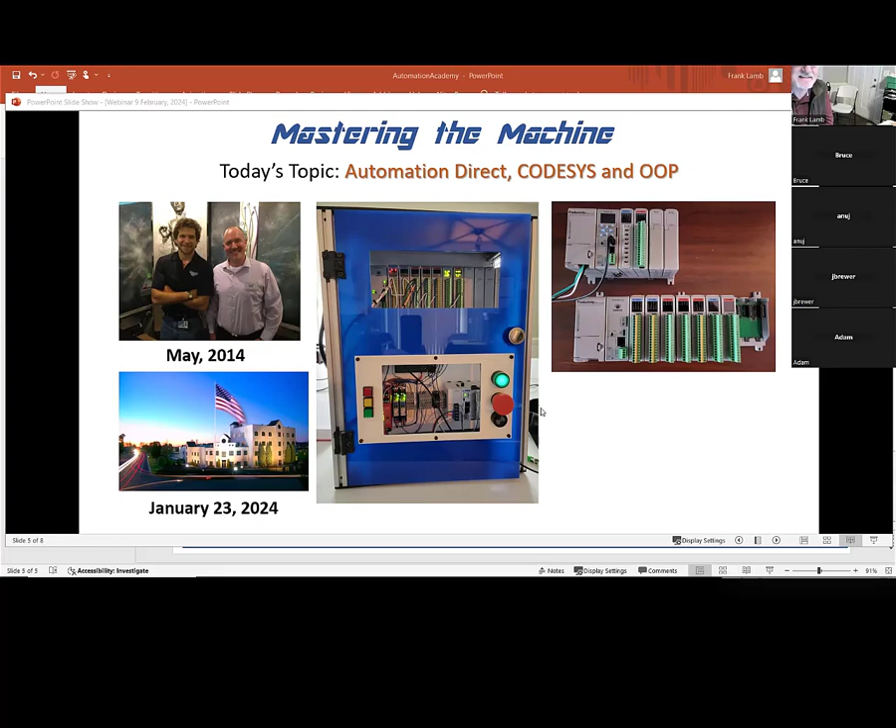So the 23rd of January is when they released their Productivity 2000 CODESYS controller. There's a picture of it on a table there, and a picture of it built into my trainer—I'm not sure if you can see this, but the trainer is over there with the other computer ready to go. That's the thing I'm going to try to go over there and connect with, but I'm going to have to use this computer to do it, which is going to be tough. In any case, that's what all this is about. A couple things I wanted to mention, and then I'm going to try to migrate away from this PowerPoint.

This was a post from Paul DeJong, and Paul DeJong teaches PLC classes around the country like I do, for a company called Automation Training in Canada. He teaches Allen Bradley and Siemens like I do, and sometimes people ask him to convert equipment from, for instance, Allen Bradley into CODESYS. He's doing a big job on that right now, and he actually posted on LinkedIn asking how he can make CODESYS look like RS Logix 5000, which is a very interesting thing to do. I don't know why you'd necessarily want to do that, but some people are familiar with a certain programming environment. So he put this up there, and I thought that was pretty cool.

Then another slide I had ready here about CODESYS is this book, which I have. Let's see if you can see that. It's actually open down here, ready for me to hook up and talk about. Then, like I said, I got sidetracked on this computer. This is the book on CODESYS, and it has a lot of really good information from Gary Pratt. Gary Pratt ran the North American CODESYS operation and taught CODESYS around the country for, I don't know, 10 or more years, I think using the Bedrock automation platform.

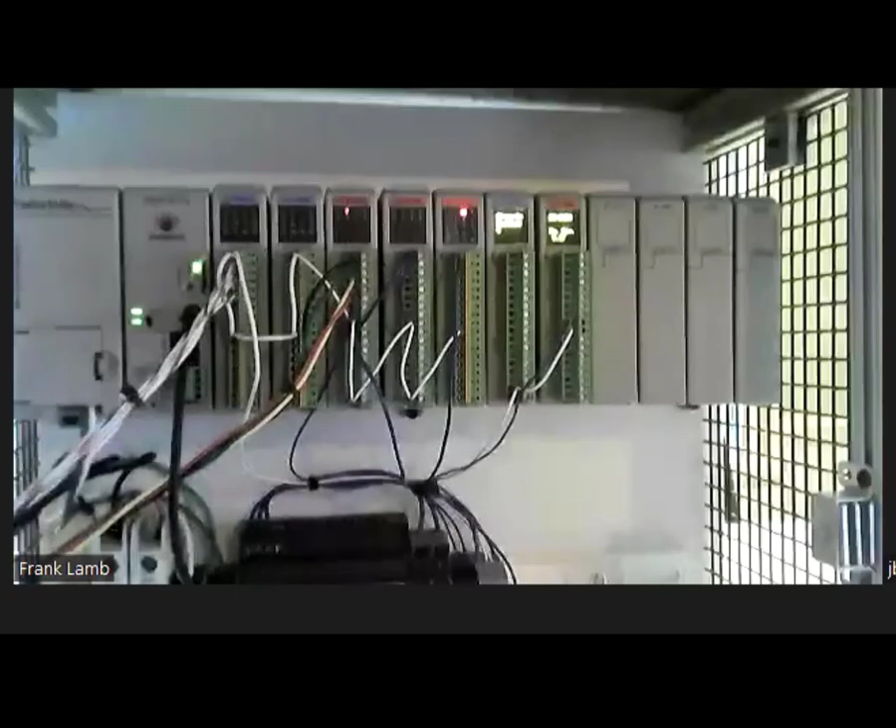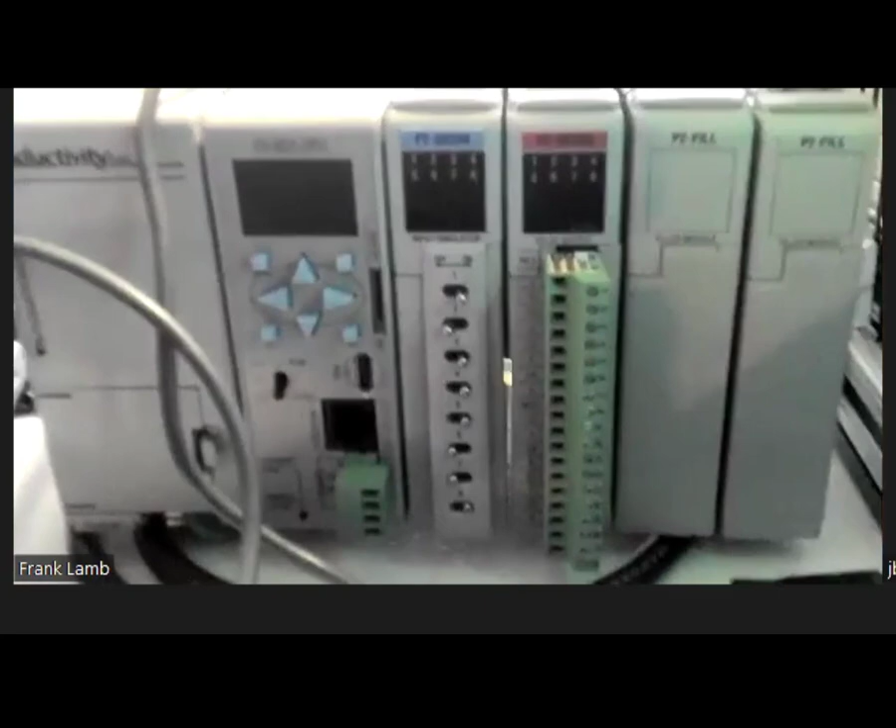In any case, this is the CODESYS controller that I built into a trainer. Let's see if we can get a little closer here. That is what the controller itself looks like - Productivity CODESYS. Hopefully folks can see that. It looks a little different than the regular Productivity, which looks like this. So that's the regular Productivity 2000 controller that I got - it's the demo system with little switches on it. And then this is the CODESYS controller. So they look very similar, and they use the same IO cards and that sort of thing.

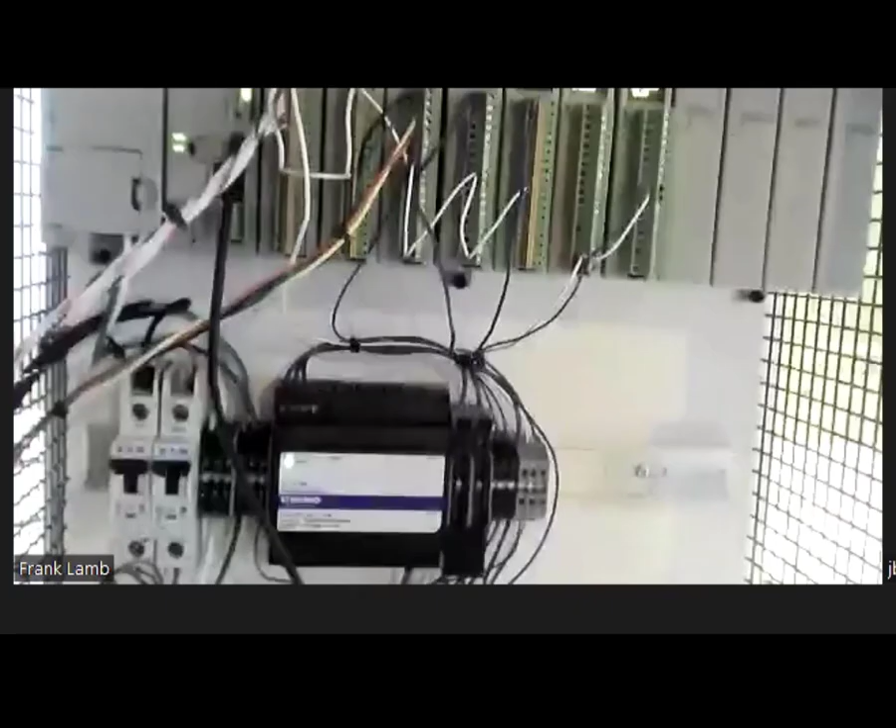I also put in here a Click Plus, and one of the reasons I did this is because the Click Plus and the CODESYS controller both have MQTT. One of the things I'm very interested in doing is using MQTT to log information to the cloud, and then from the cloud transfer information down to another controller, probably using something like AWS, Amazon Web Services, which I have an account for. So that's kind of the plan.

The other thing that's in this trainer that's kind of interesting is a safety circuit, and there was a whole lot of wiring associated with it. But basically what it does is it has an e-stop - you can pull the e-stop out, power it up, the relays come on, etc.

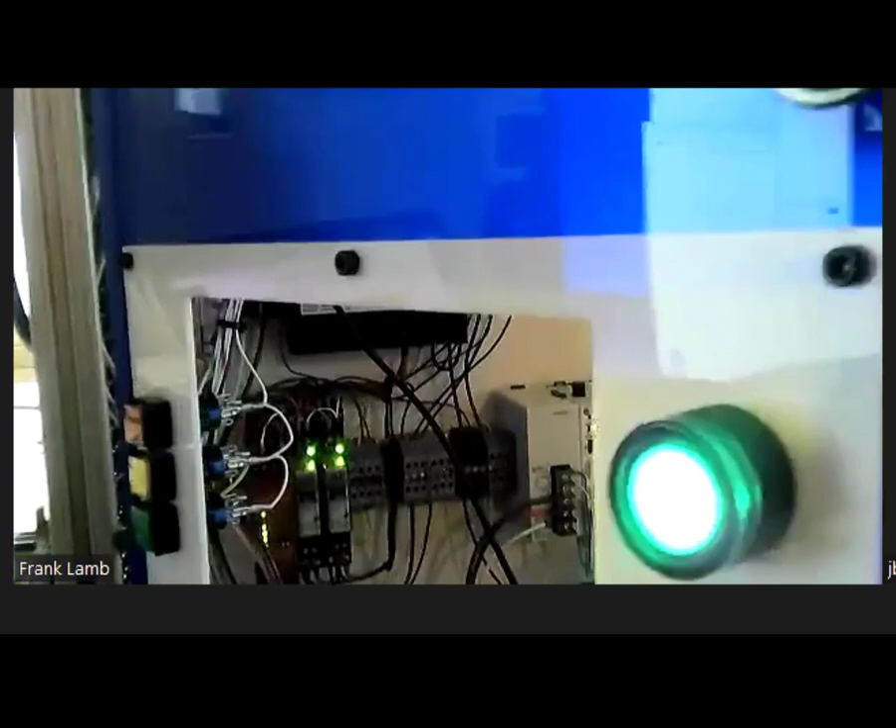Now, the reason this kind of matters is because in my simulation, let's see how well we can see the computer here. This is the other computer, and I don't know how well I can hold this with my one hand, but I'm going to try. Oh boy, this is awkward.

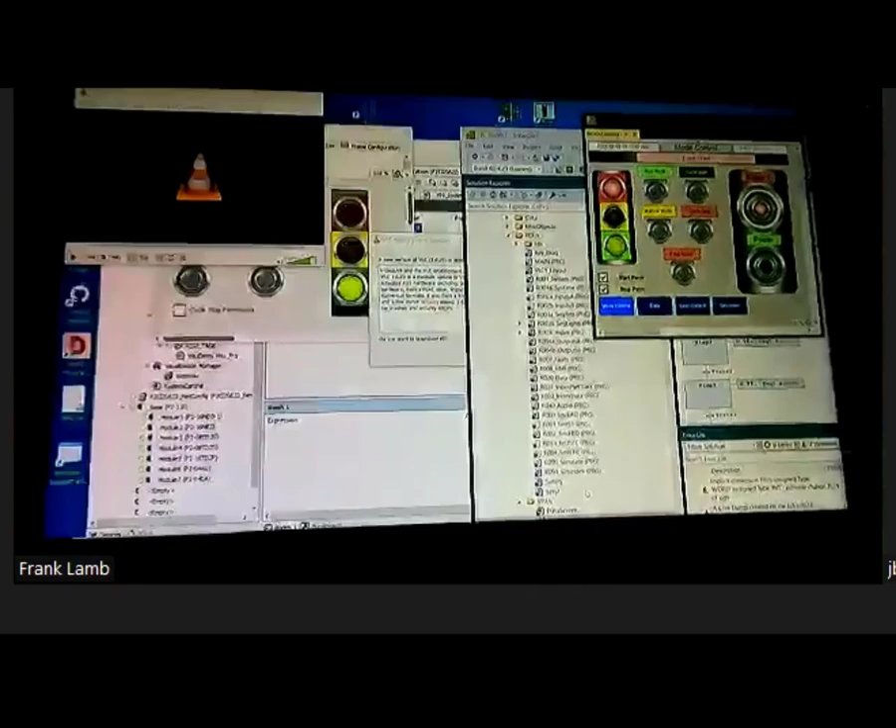Mouse is boggling around. All right, this was the webinar screen. I'm going to move that and go to the programming screens. Not sure how well everybody can see that. What I've got here is VLC media player update - no, I do not want to download it. This is the CODESYS environment.

So I'm already running, I'm connected up, and I have a very simple application running here. I have a main program. The main program then calls the system routine, very similar to what I would have done in Allen Bradley. And so the system routine, if I go to that, looks like this.

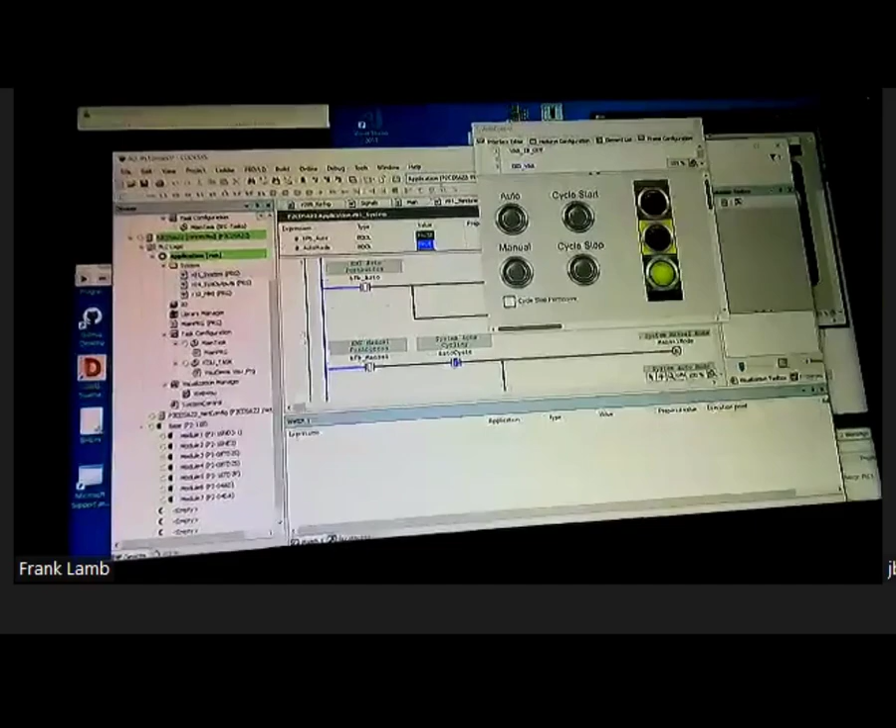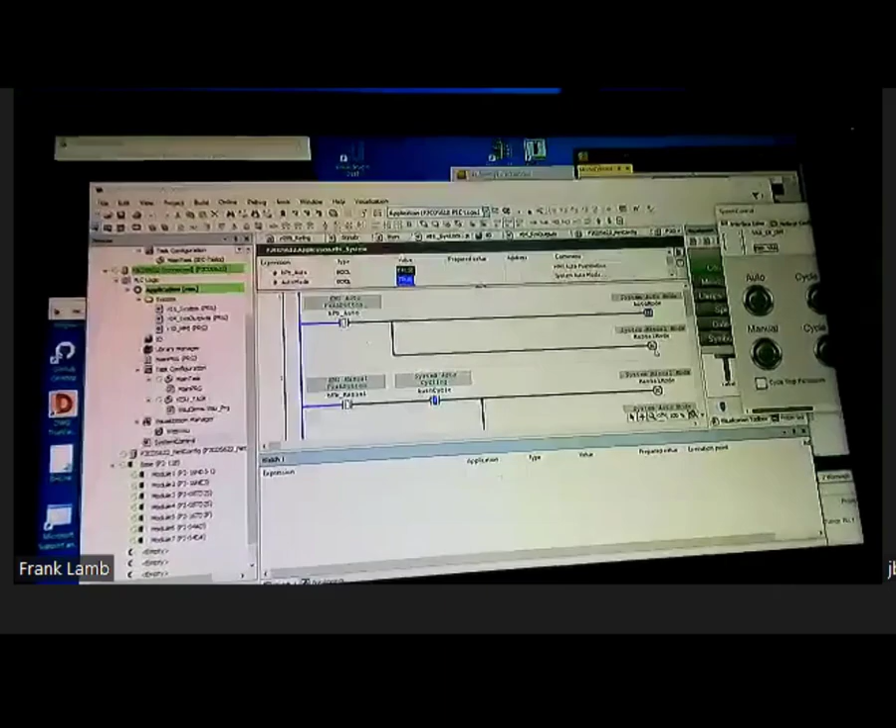I did it in ladder logic on purpose because most of the people that take classes from me, that's what they already know. They know ladder logic, and I have books with how to do all this in them. And so typical have the auto push button, go into auto mode, go out of manual mode. This is ladder, pretty simple stuff. Cycle start permissive, a little timer to do your cycle start, and then a cycle stop request so that you can't just simply stop. And then what I do is run a little simple HMI.

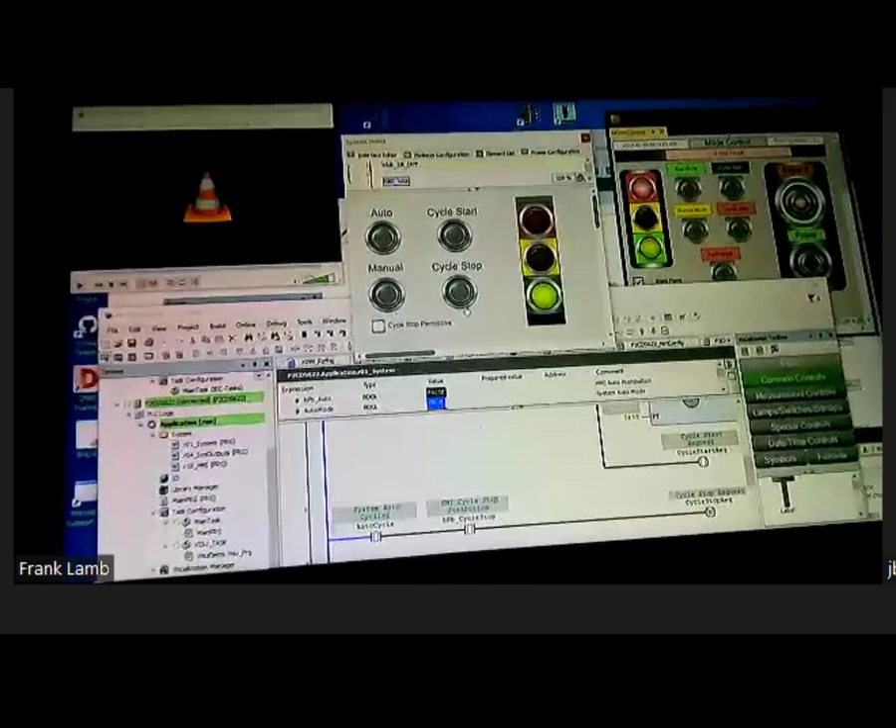And this is the little HMI. There's something called visualizations. Visualizations in CODESYS will run on your local computer, or there's a way to even put a web visu, which means download a page like this, like a little cycle start, cycle stop push button, and download it into the controller so that people can access the controller and push the buttons with the mouse on their computer, which is a pretty neat technique to use.

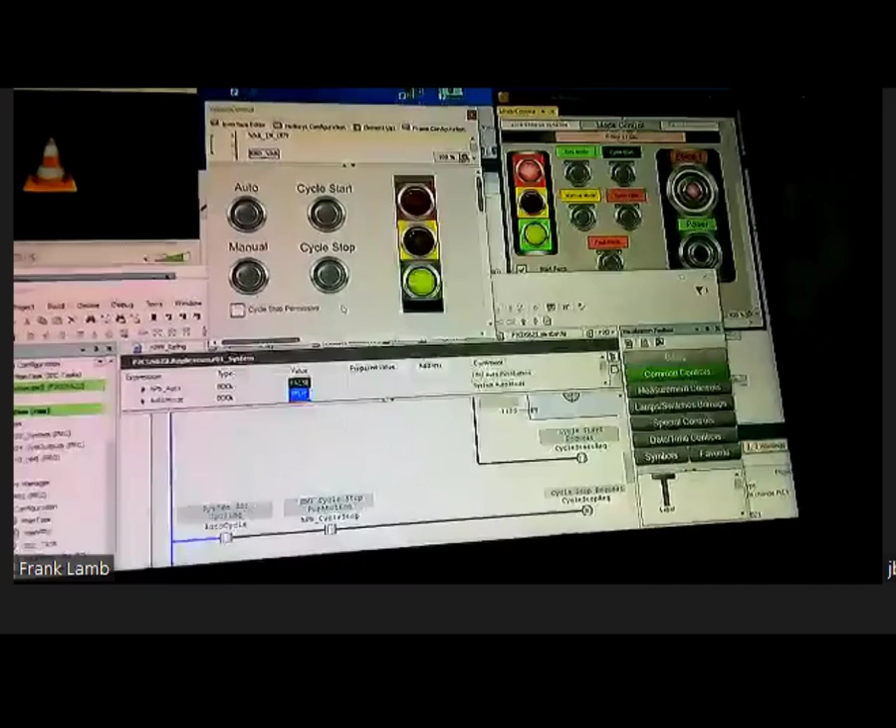So just to kind of show how this works, I can, for instance, go into manual mode, and all that does is turns on this yellow light. And also, if I go over here, you can see the controller. If I go into auto, right, I am using the actual IO here to blink the light here and here.

And then I even have a buzzer hooked up if I'm in auto mode and I hold the cycle start button with a cycle start permissive, real loud, and I'm in auto cycle.

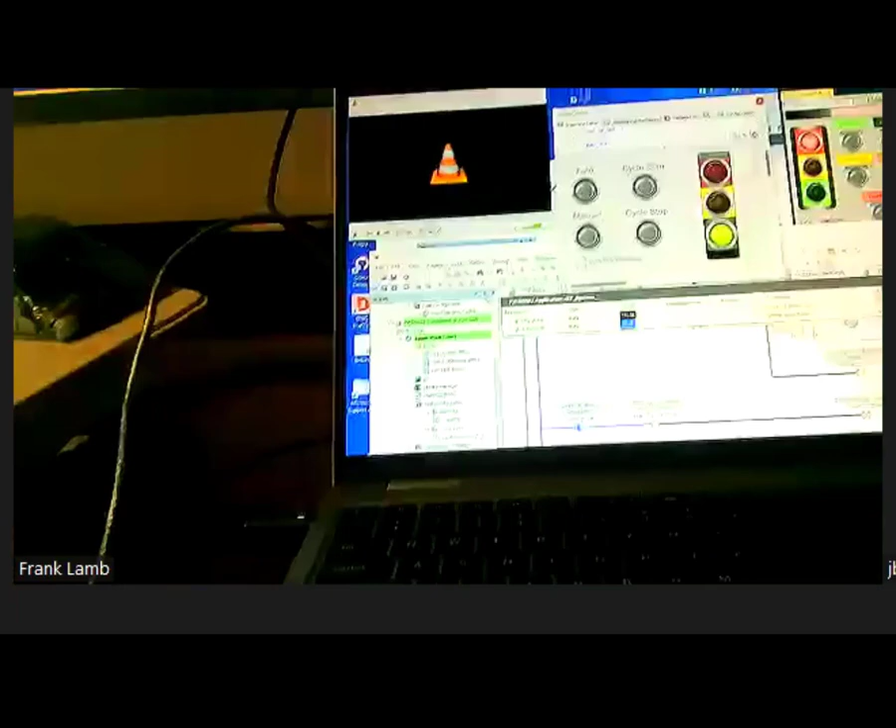So this is a really simple application that I usually use as a starting point in a class. So if I'm teaching regular PLC programming, I like to start with this kind of thing.

And then I also did create a little blinker here. I just used 2 timers to create the blinker. You can find all this kind of stuff online. So there's not really a ton of logic in here yet. I just got this controller, and this is kind of where I started with it.

And you'll notice up here, there's something called Control Win. Control Win lets you simulate the logic on your local computer. So there is a local sim that you can just push the button and simulate a single routine, or you can log into the actual fake PLC here, and it will run for 2 hours, this Control Win.

So I could take this logic and download it in there, but since I have a real controller, I don't have to worry about that. And so you can see the general idea how this runs.

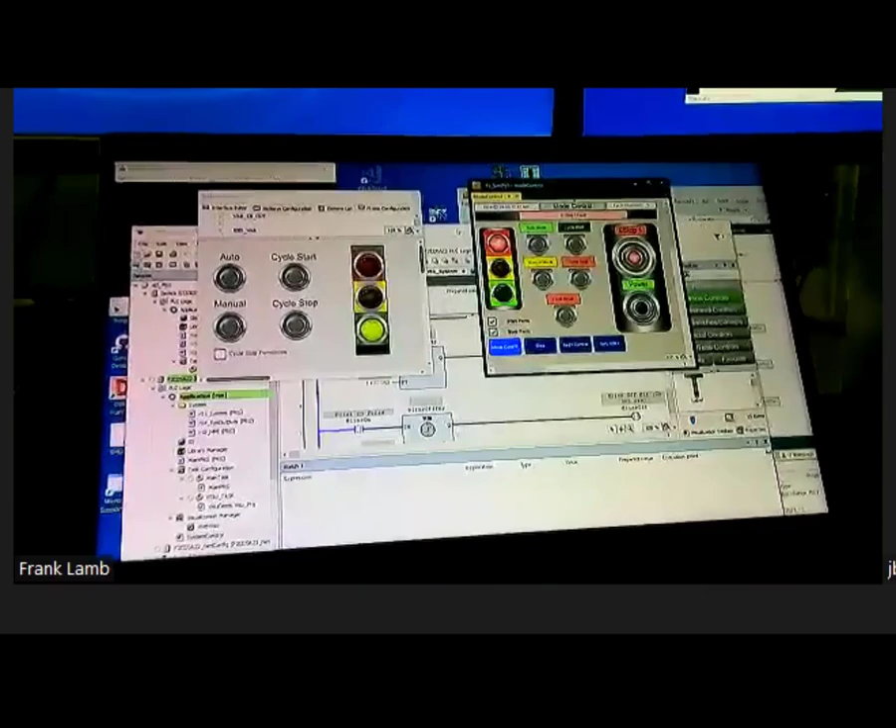Now, what is my ultimate plan with this? Well, one thing, this is Beckhoff. Beckhoff is very, very similar to CODESYS. It was based on the same thing. And so I have a much more elaborate program here in Beckhoff.

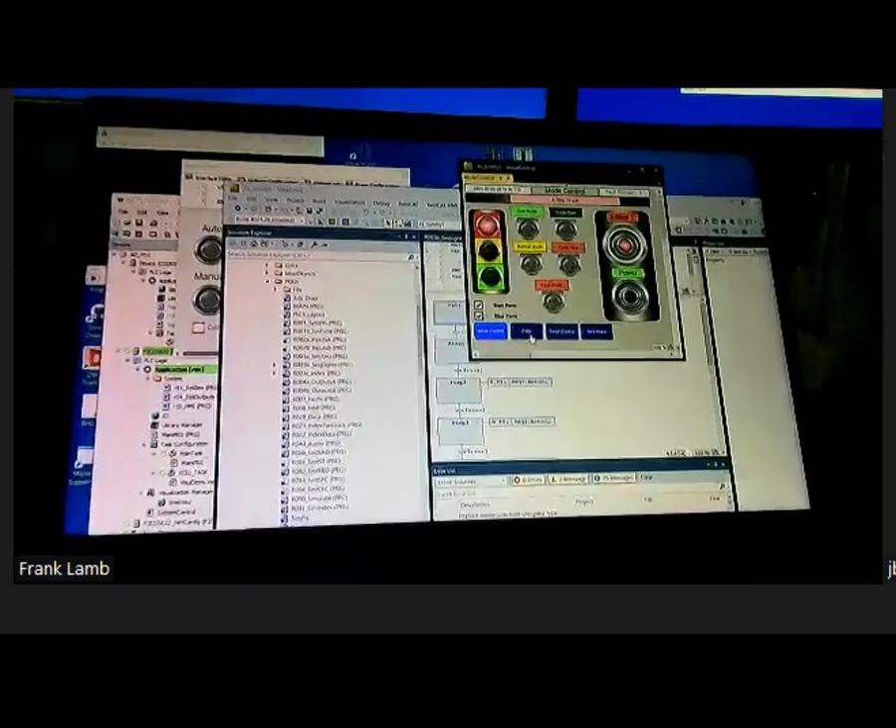It has a lot more routines, and I created this. I think I've been working on it for a year or two on and off. But what it has is the same visualization type stuff, but you can see here from the local visualizations, I can change screens, and this is the same on the other visuals. I can go to my data screen, see how long I've been running. I can go to a simple sequence control, and I even have a kind of an animation here of a little sequencer.

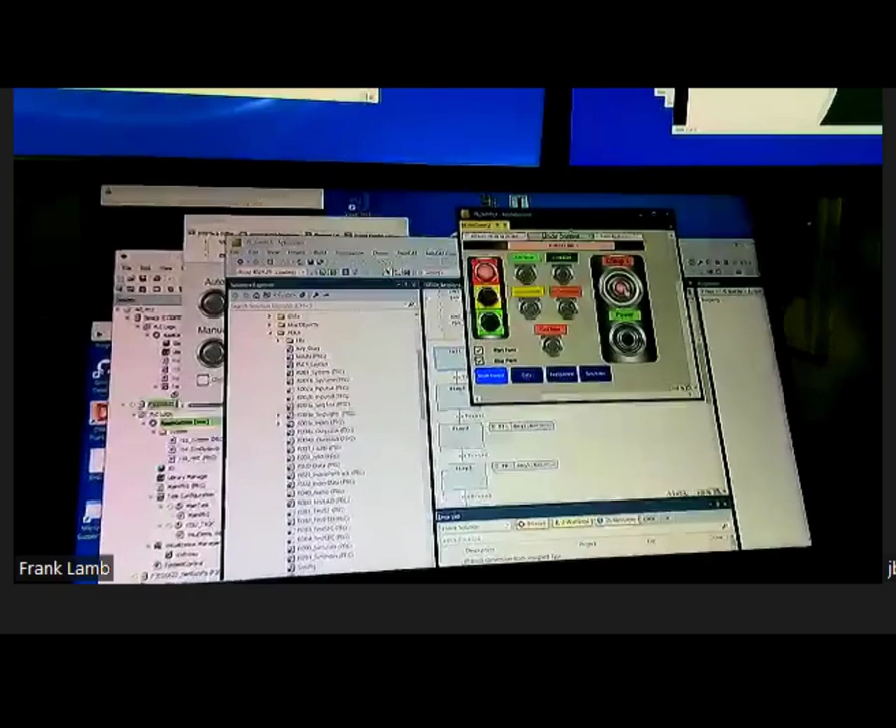Let's go into, and here what I had to do is create a fake e-stop. I didn't have real hardware for this - I actually do, but I'm not connected to it. So hit my power, a fault reset, a little more elaborate than what I had before. And once again, I can do a cycle start here, just like the other controller.

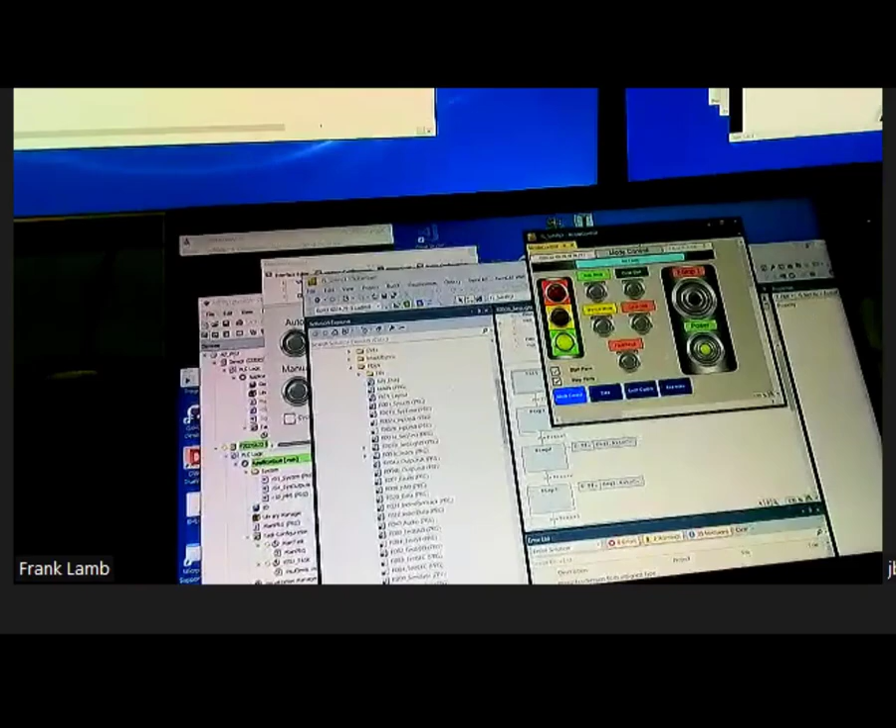Notice the noise is different, and that's because this brings up an application. I've done other webinars on Beckhoff, so you don't need to necessarily see how all that's done. I wouldn't have been able to do that in the Productivity 2000 because it is not a computer. It is a full PLC, so you have to use real hardware if you want to turn things on and off.

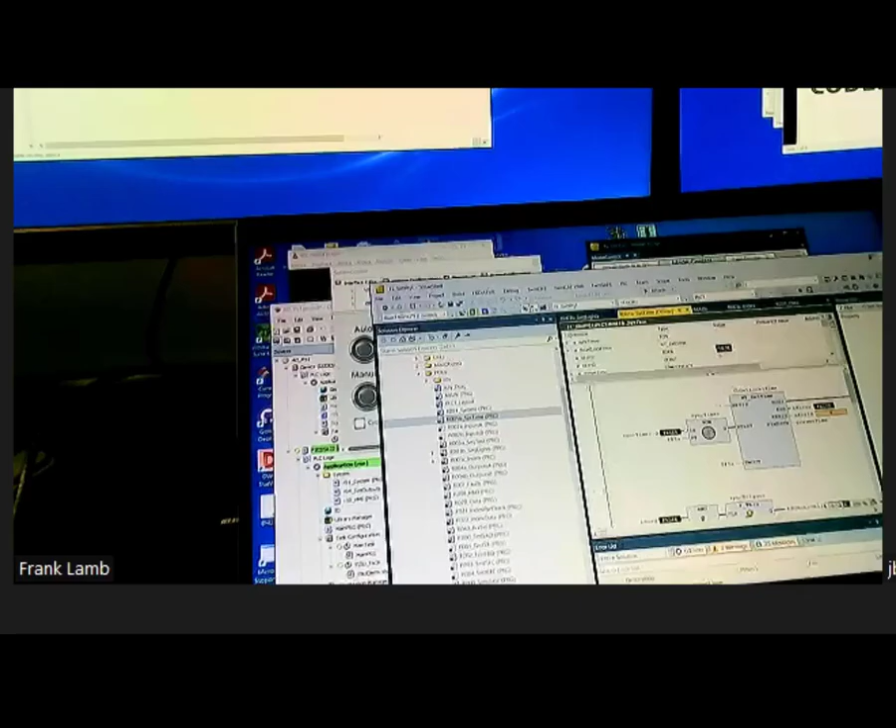I've got function block diagram here for time. See how well everybody can see that. You can see it somewhat. I imagine this is kind of blurry and doesn't run in real time, but you get the general idea.

Lots of routines, POUs, and we'll talk about object-oriented programming, which is kind of what some of this is. It's a matter of protecting your variables and linking things to each other. I'll show you something that looks a little more object-oriented here in the CODESYS software.

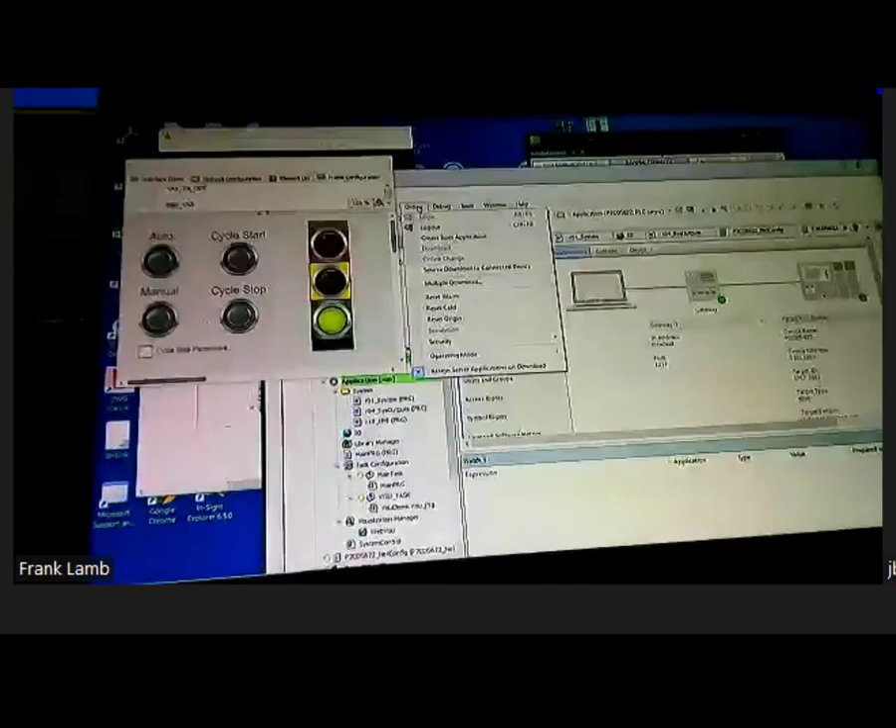If I open this, let's see here. This always stays in the front, so let's see, there is the connection. If you want to connect to something, you have to click on this scan network, configure your gateway, and connect up here, log in. So once you're logged in, then you're connected via, in my case, USB here.

And then you can see things actually running, and you can select things just like you would if you were offline. So here, let's see, I'm going to bring up this control win, which I did this little exercise. It's kind of fun here.

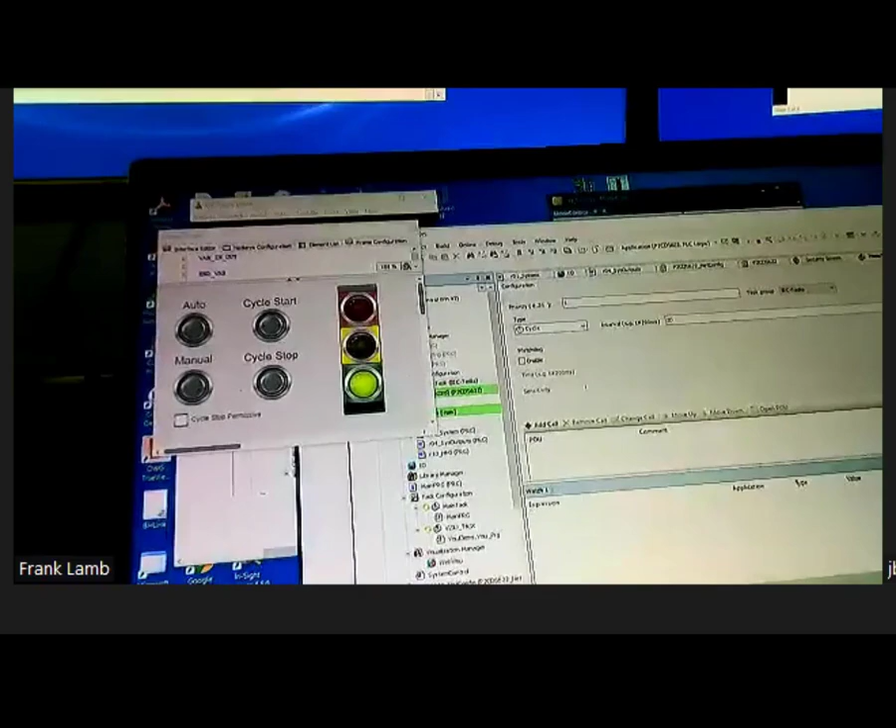I think it's not in the main task. Where is it? You'll see logic. No, that's not it. I'm looking for my main routine, which was written in continuous function chart, CFC, PLC logic. I may have to log out to do that. Yeah, it looks like I do.

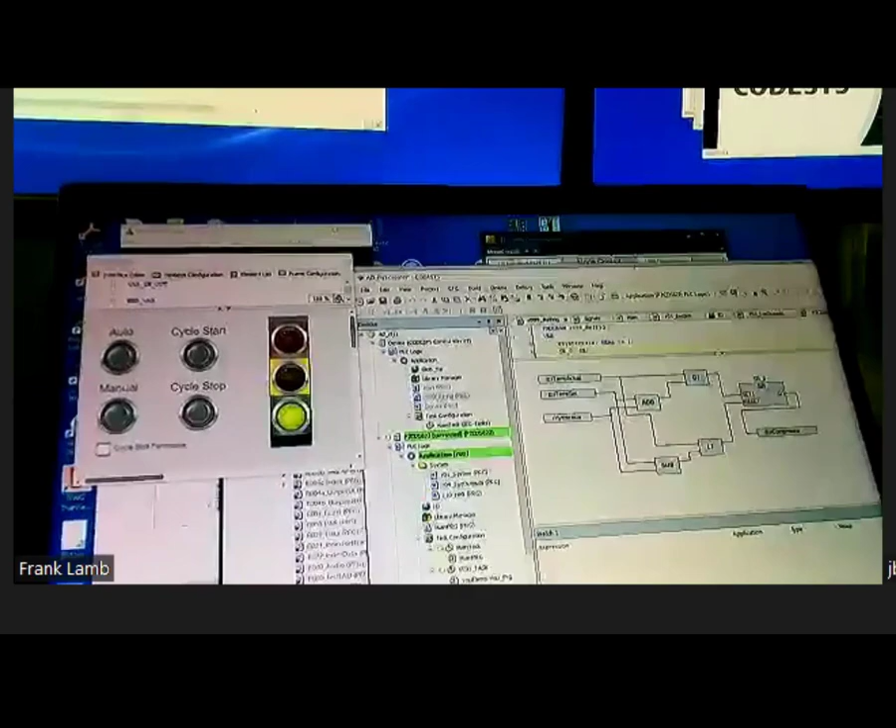You can see here, main refrigeration. This was an exercise. There we go. Actually, it did come up.

So this is somewhat object oriented. This is an example of what a little bit of OOP might look like. These different things here are objects. They are linked to, in this case, a global variable.

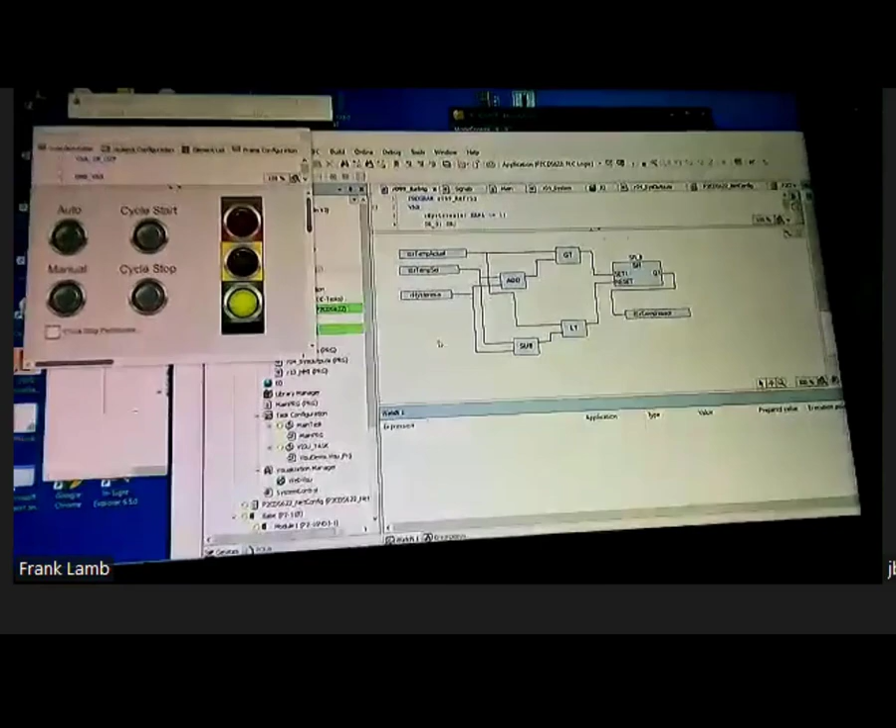A lot of people who are proponents of object-oriented programming, such as Jakob Sagatowski, would say you don't want to use global variables for anything, right? You want to make everything kind of private to the routine that it's in, and then there's other ways to exchange information. So everything becomes an object.

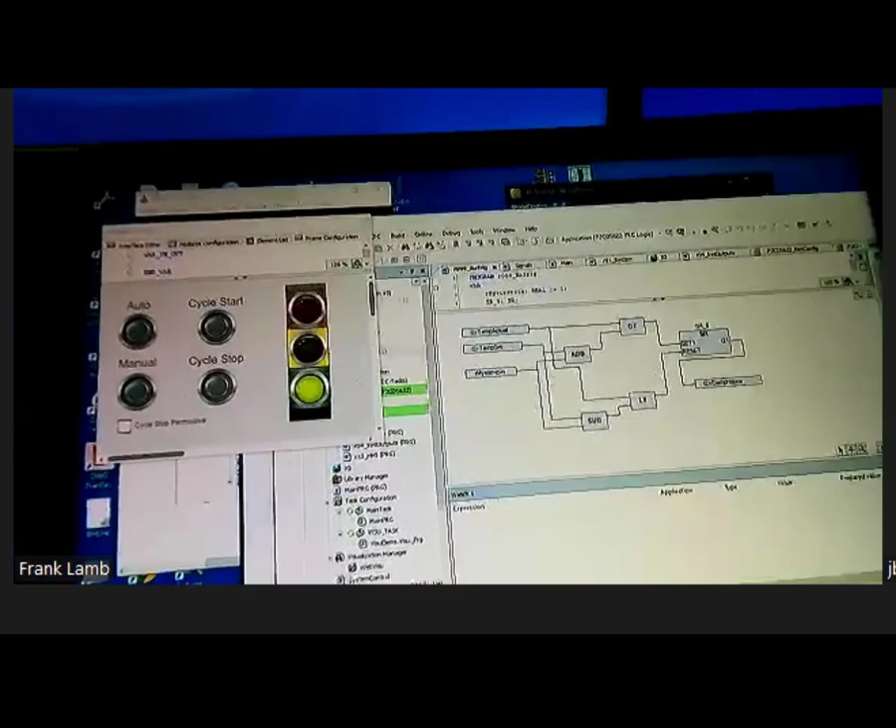And the general idea there would be, and this is not really object-oriented programming, let me see if I can bring something up that looks a little more like that. That looks a little more object oriented.

Each one of these routines sort of could be created as an object. Let me bring up a block. These function blocks are objects.

So what they have is, just like Siemens or Allen Bradley's AOIs or anything, they have inputs associated with them, and then they have outputs, and you can protect the inputs. You can turn them into different OOP things like methods or actions, and then you can expose those methods and actions as needed to other routines or other controllers or whatever you want that can access those.

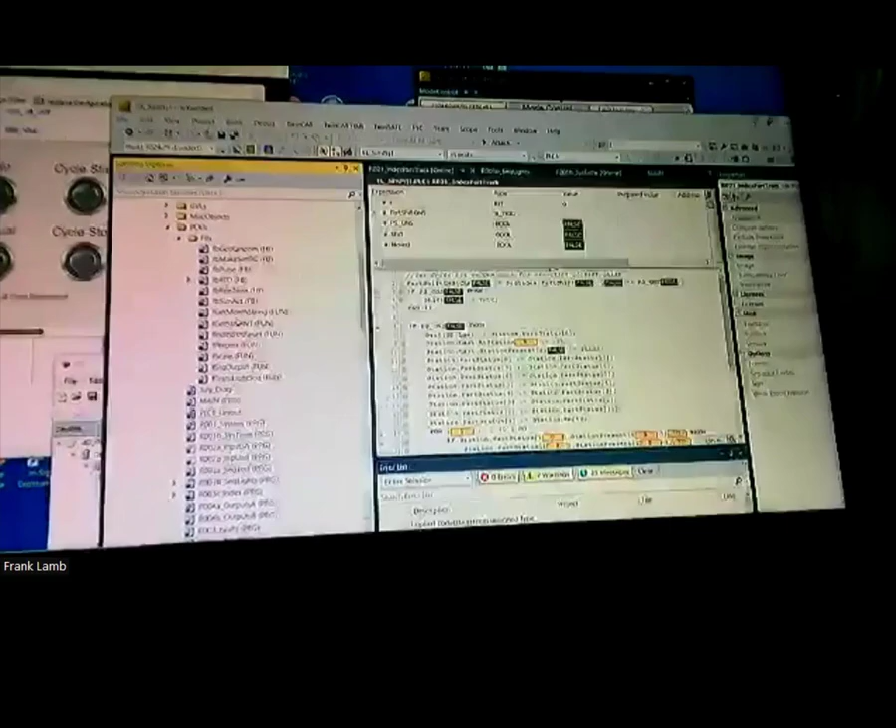So because of object-oriented programming, you can protect your data inside of these objects and not expose them if you don't want to expose them.

I had intended on doing a lot more on the OOP concept, but I don't have access to everything on this computer. It's really hard, I'm actually holding this camera with one hand. So that was unexpected.

Ideally, I'm going to have to either get Zoom installed on this computer by Automation NTH, or I'm going to have to do everything on the other computer, because I can't use Zoom to do it.

But that's a little bit of a look. Not sure everybody can see that. That's structured text, basic if-then type statements. Here is a runtime function block.

This is actually a good thing to kind of show. Let me see here, runtime, index data. I have a data routine. I don't remember where everything is, but my data routine is somewhat object-oriented. Where is it?

Maybe here - and again, you can't necessarily see the objects because this isn't a graphical programming language, but each one of these can be treated as objects. So if I see manual runtime, there is a device input, a system input that says what mode I'm in, there's a set point for it. It's accumulating seconds, minutes, and hours, and the result of that object is this data.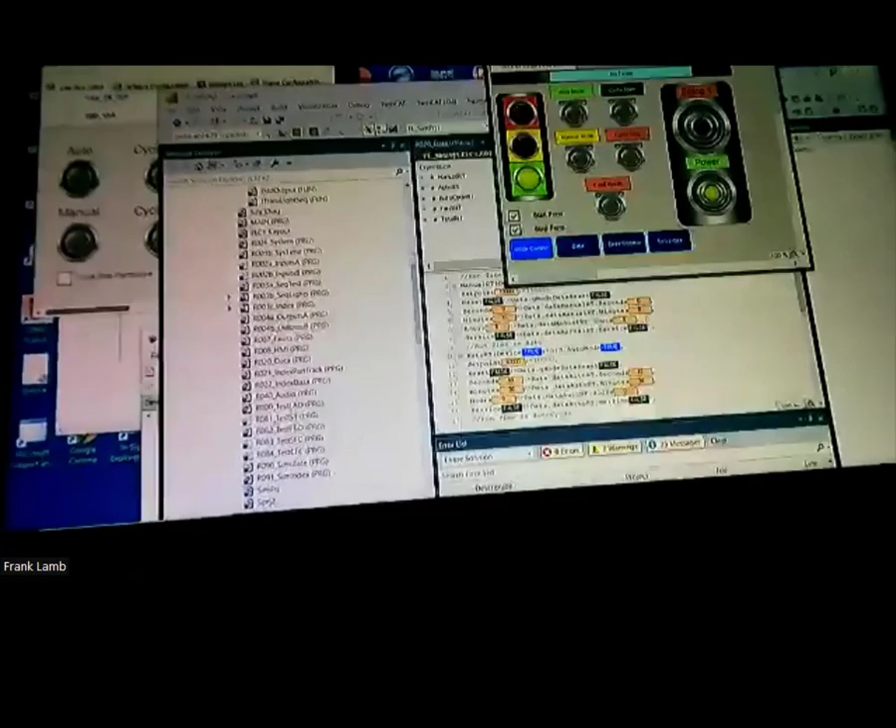I've kind of done this on Beckhoff before. I'm going to reproduce most of this Beckhoff stuff in my productivity controller for CODESYS. That's the intent - everything you see here ultimately will be migrated into CODESYS. So I also experimented with that migration yesterday.

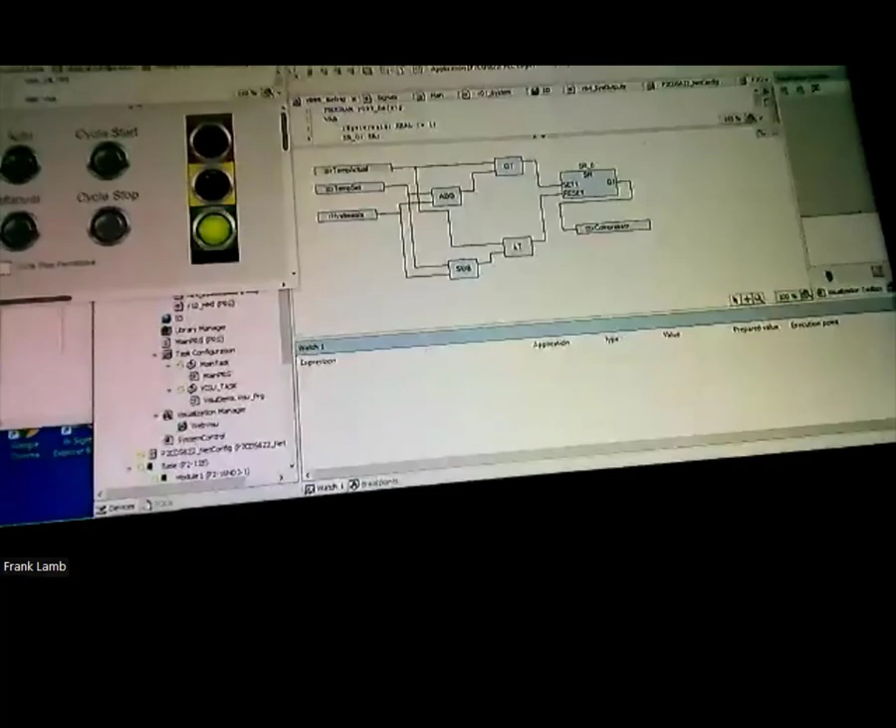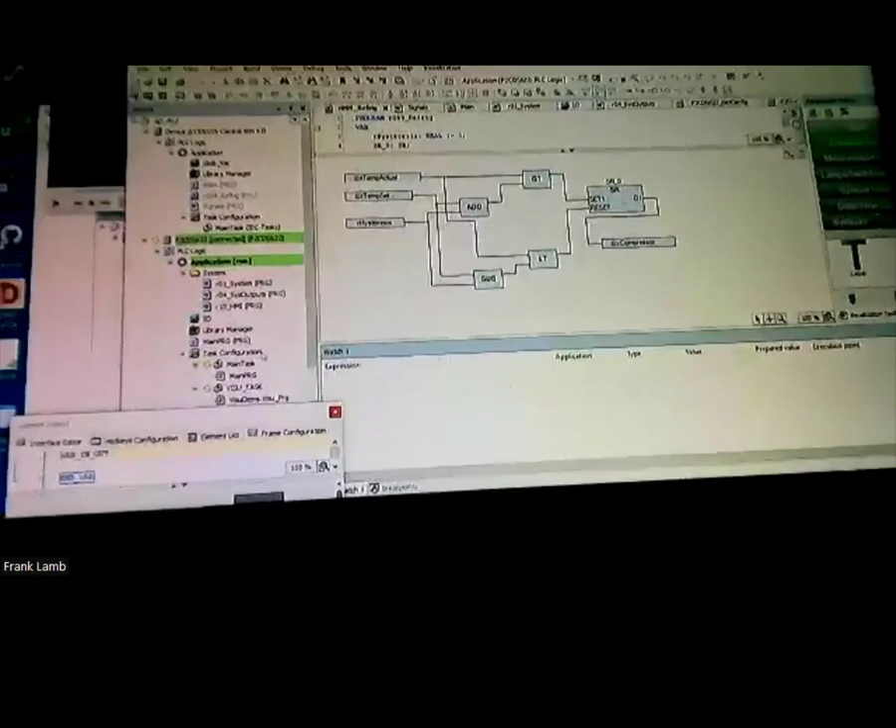One of the things I found out is that if you export a Beckhoff program, all of the data ends up in XML, but it says TwinCat XML. So it's a TwinCat function block or a TwinCat block of some kind. It does open it as text. It says export as PLC Open, but it does not directly import into CODESYS.

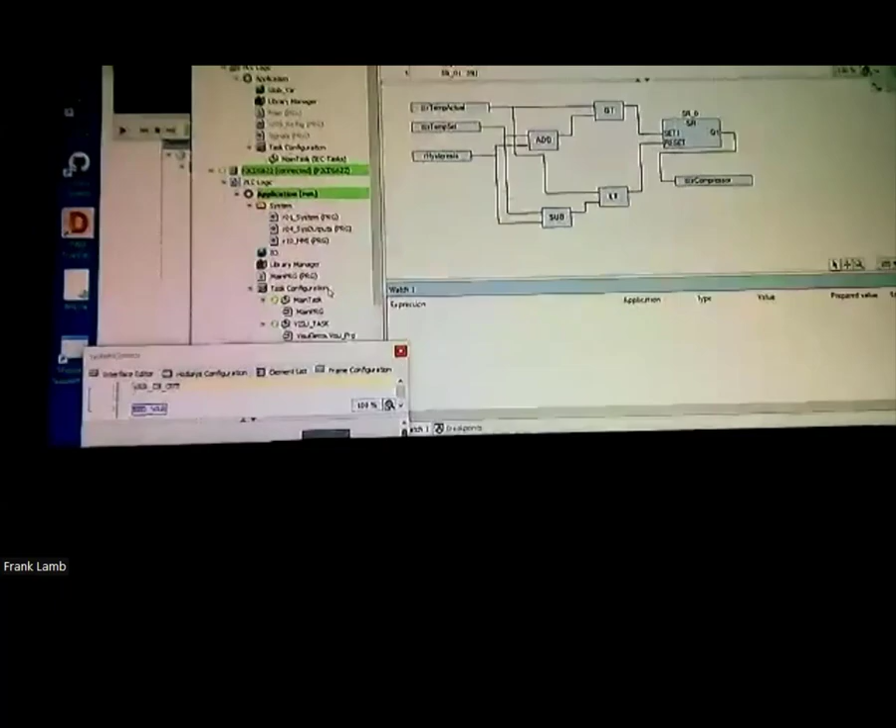So Beckhoff and CODESYS are somewhat different. But what you can do is copy all of the XML text from one block into another block and then instantiate that block in CODESYS. So there is a way to migrate, but it's not seamless.

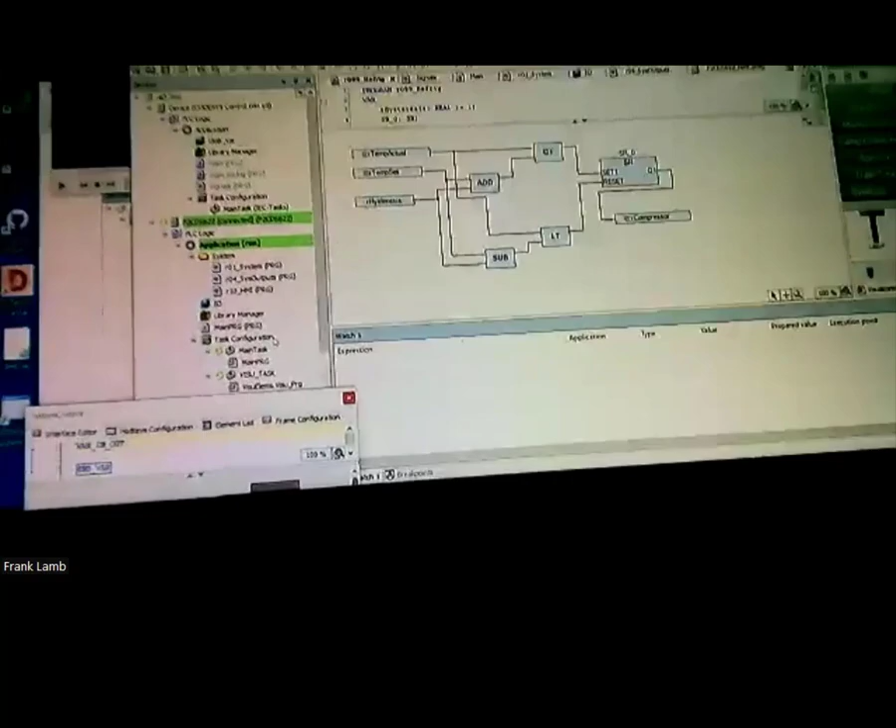Unlike if you were to migrate a CODESYS project to another platform - I don't think you'd have much of a problem with that, because the code would be exactly the same in the same format. So I could basically copy a function block from one platform to a different program in a different platform.

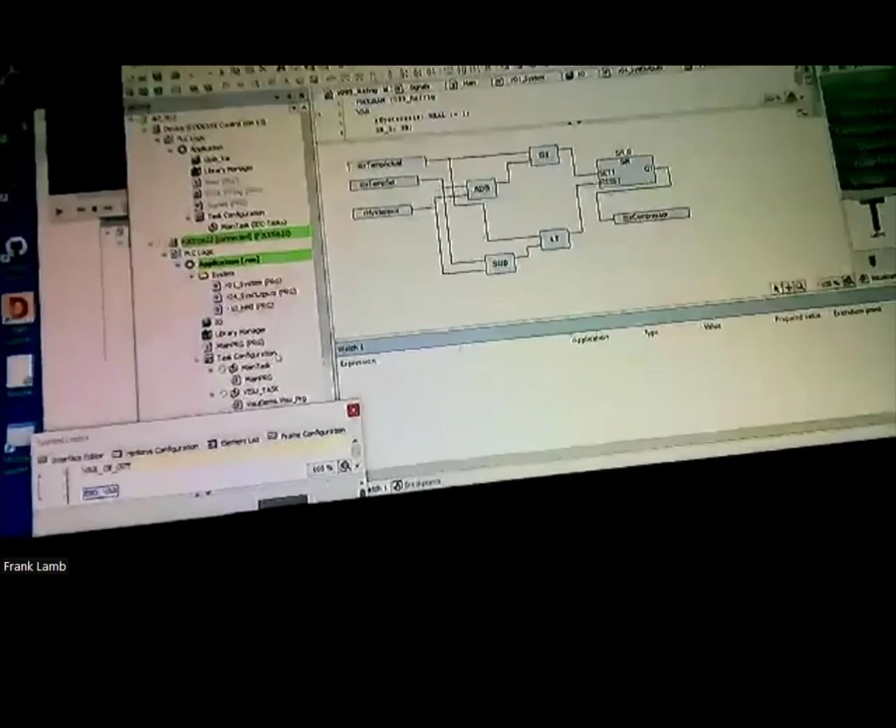One of the things that I read when I was looking at this online is that different CODESYS platforms, some of them have a separate software program. I think PLCnext would be PLCnext Engineer. Schneider, I don't know if that's their SoMachine platform, I think it is - so it's CODESYS, but it's sort of hidden inside their own software. Automation Direct did not do that - they're direct CODESYS, so you have to install CODESYS from the CODESYS website.

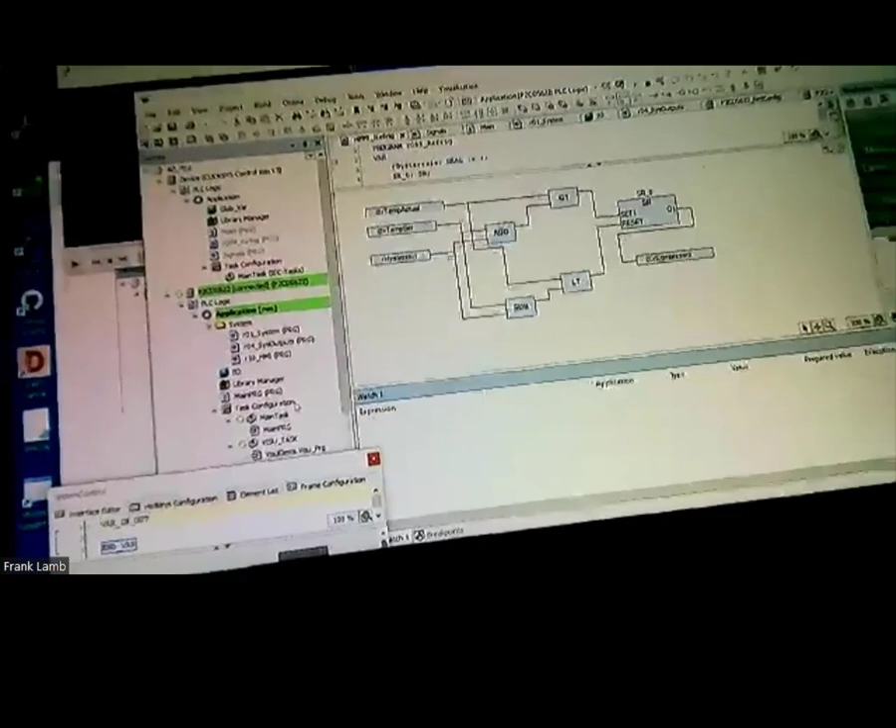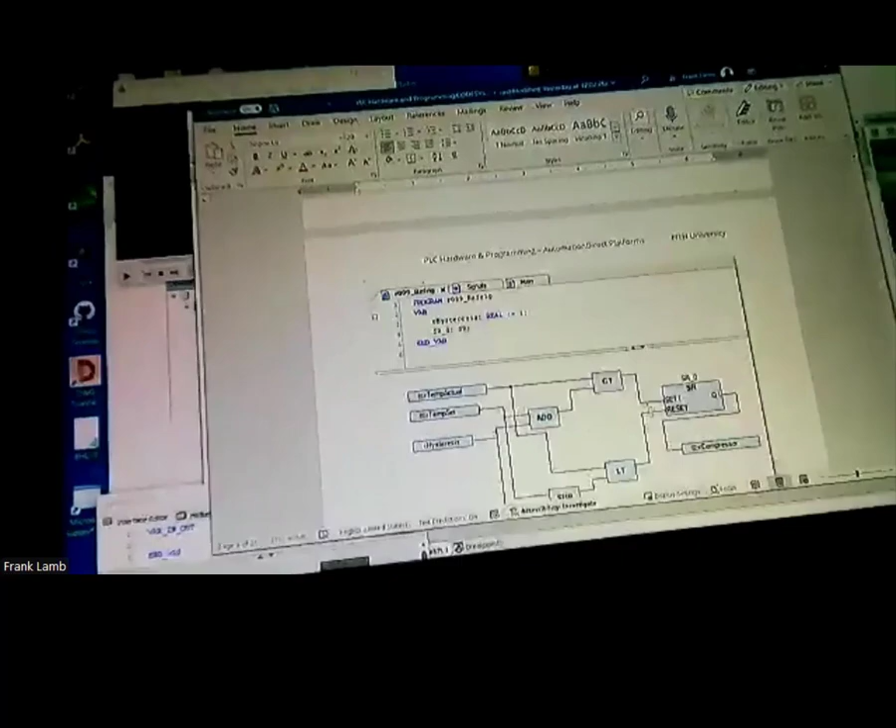...is talked through all of the things that you need to do, going online to the CODESYS website to install the software. So this is all the stuff that it takes to do that, and then do this sample project, which, as I mentioned, is in continuous function chart. Looks like that - let's see if everybody can... yeah, it looks like you can still see that. So that's kind of what the book does, it talks you through that.

And then something very particular to the Automation Direct platform that makes it a little bit awkward is you have to add the device, and there are a lot of things particular to Automation Direct that would not apply if you were doing Schneider or Wago or something like that - it would be different. So even in the book on CODESYS by Gary Pratt, he mentions that he does not cover the 'at' function.

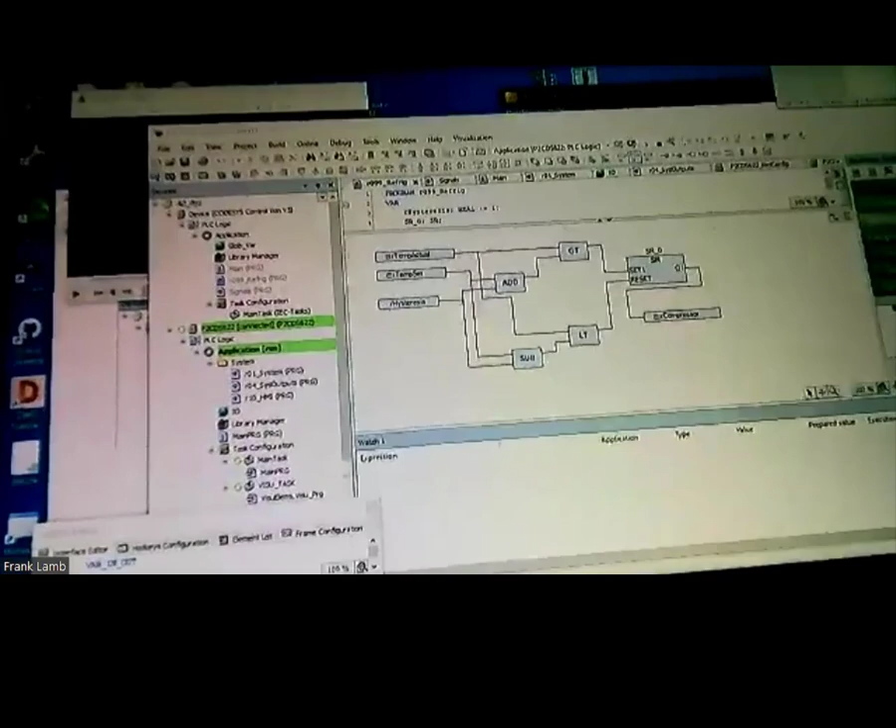At means I can use a wildcard, and I can say 'at' whatever the address is, and then link that at. Let me see if I can find that in here - I'll show you exactly what I'm talking about. If I go down here, and let's go offline real quick.

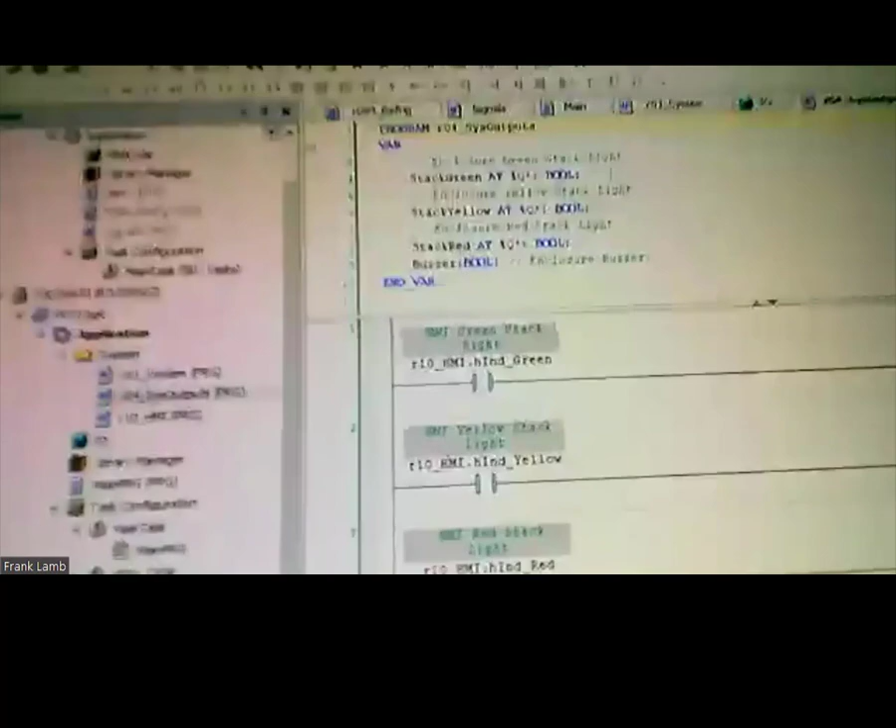Log out, and you see these 'at's - let's see if that shows up. Yeah, it says 'at' %Q asterisk - so that's a wildcard. It's used locally here, this was just an experiment I did yesterday. It's used locally, and then there is a global variable list...

...that you can link, and you can go in there, right click on it, and say 'add all instance paths.' I think hopefully everybody can read that - I'm going to look back at this video and see whether everything's readable or not. But anyway, when you do that, this is the result you get - you get your stack green, stack yellow, stack red, etc. And then this was all added manually.

So what you do is put the wildcard in there, and then link to the global variable list, if you choose to use a global variable list - which a lot of people kind of frown on doing. But anyway, that's a little bit of a look at the code. Once again, there's the link back to the other wildcard %Qs. You would do the same for the inputs, and of course you'd be writing a lot of these routines, as I showed in the Beckhoff, in other languages.

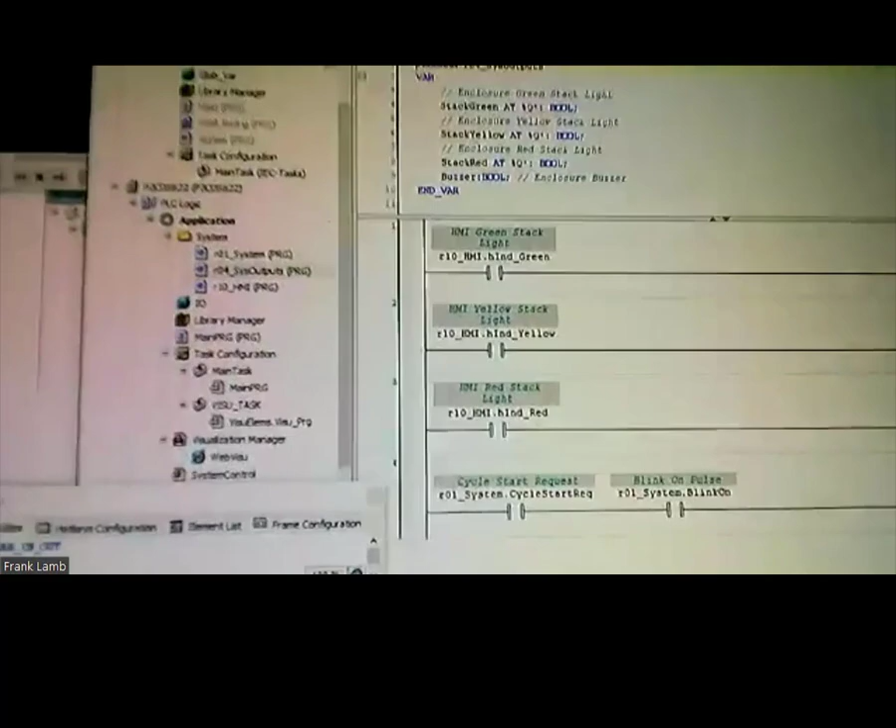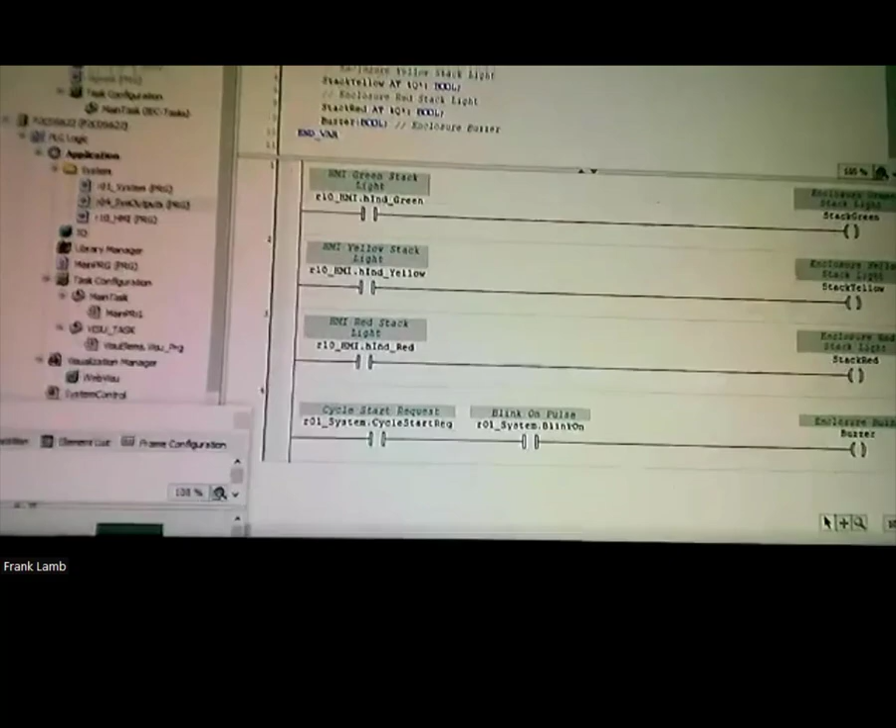That's one of the advantages of CODESYS, is you don't have to buy special licenses. Like if I were in Allen Bradley, I would have to buy a special license for structured text - it does not come with the basic programming software. Same thing for Siemens - I think the professional version has some of the more advanced languages, sequential function chart, things like that, but the base software doesn't include those. So CODESYS includes everything.

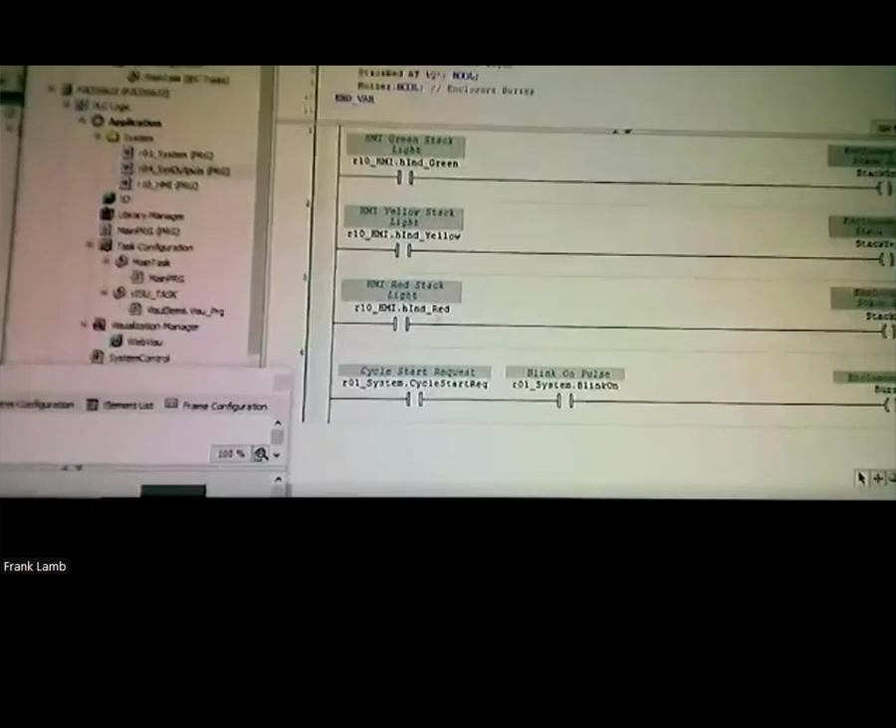It includes the 5 current languages: structured text, ladder logic, function block diagrams, sequential function charts, and continuous function charts, not including instruction list. I think there's still ways to use it, but I guess they don't really recommend doing that. There's not really much reason to do it.

But anyway, that's a little bit of a look at the software and some of the things that I'm working on, and the controller itself, which looks like that. Like I said, I've gotten it just to the point of putting some simple code in here. Called it Automation Direct Project 1.

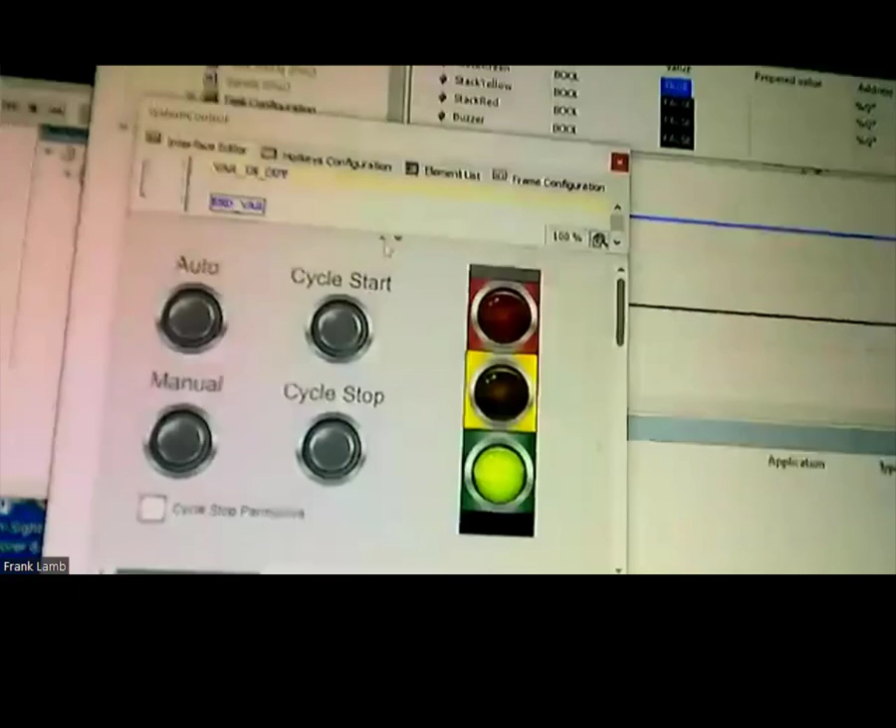Again, to go online, you just hit login. It gives you a warning saying certificates are about to expire, asking if you want to open the security screen. I'm going to open it to show you something. I got a message saying gateway not configured properly, and I'm not really sure why. The gateway works fine. I have a question into Automation Direct, but there's not a lot of online information yet for the Automation Direct platform.

CODESYS is CODESYS. You'll be programming in that for any platform, but there are going to be a lot of particular things to your platform that you're going to have to load.

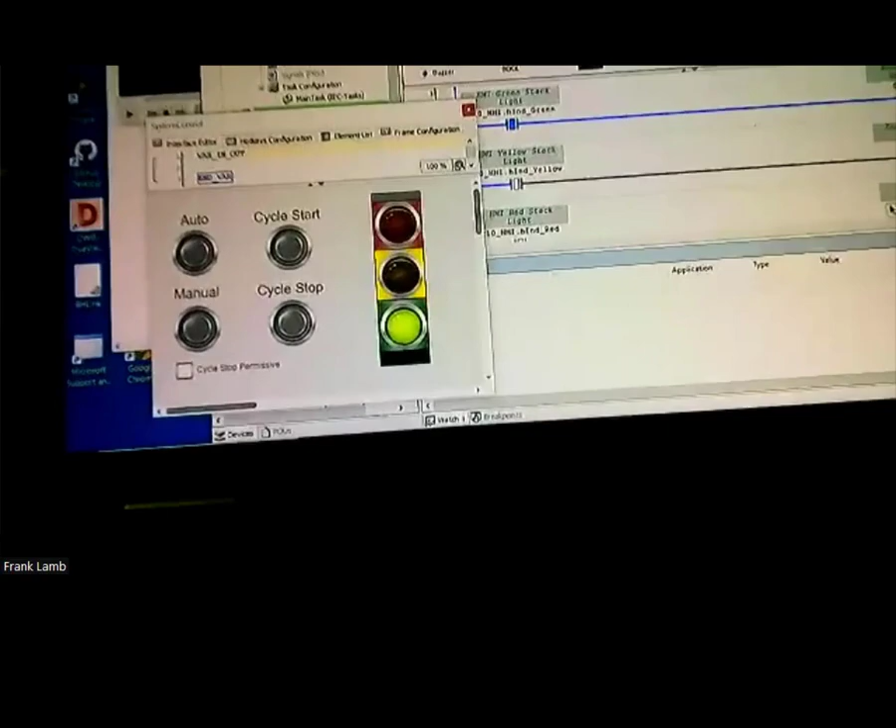And once again, that's why I put this book out. There we go. Oh look at that, it's not even coming to the front. There we go. So I put a lot of things in here, like configuring the cards, setting up USB communications. Let's hit enter there.

How to do that, and that's going to differ from platform to platform. So this will look different than whatever you do on your particular platform if you don't choose Automation Direct. I know there's some folks watching from other countries - Automation Direct does not ship outside of North America.

So you'll be able to get your own CODESYS platform, something like Bedrock or Wago, whatever country you're in. Automation Direct doesn't ship this stuff. This is about as inexpensive as you can get. I want to say this controller, just the controller part, was $529, which is kind of a lot still, but you're paying for the hardware and the license embedded on it, the runtime. So that's kind of the way that works.

And then I have all the particular things that I ran into problems with here on the Automation Direct platform. Get into libraries, which applies to everything - you'll need different libraries, the standard library, the IO library, things like that. A lot of this stuff is from the Automation Direct website, how to use your particular platform. I'm just doing a lot of this and kind of doing discovery myself right now.

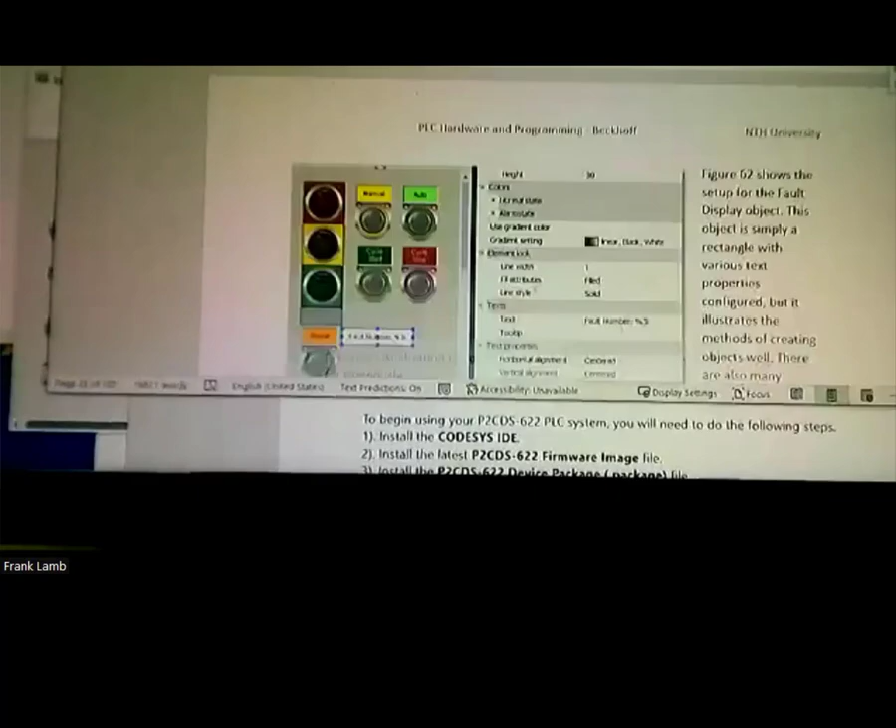This was my original Beckhoff book, which looks like this. I have a lot more material in here - how to do more structured text, how to link your variables, how to program in lots of structured text examples, how to create visualizations, how to program in function block diagram, how to program in SFC, which is this. And then I have examples and a sample program.

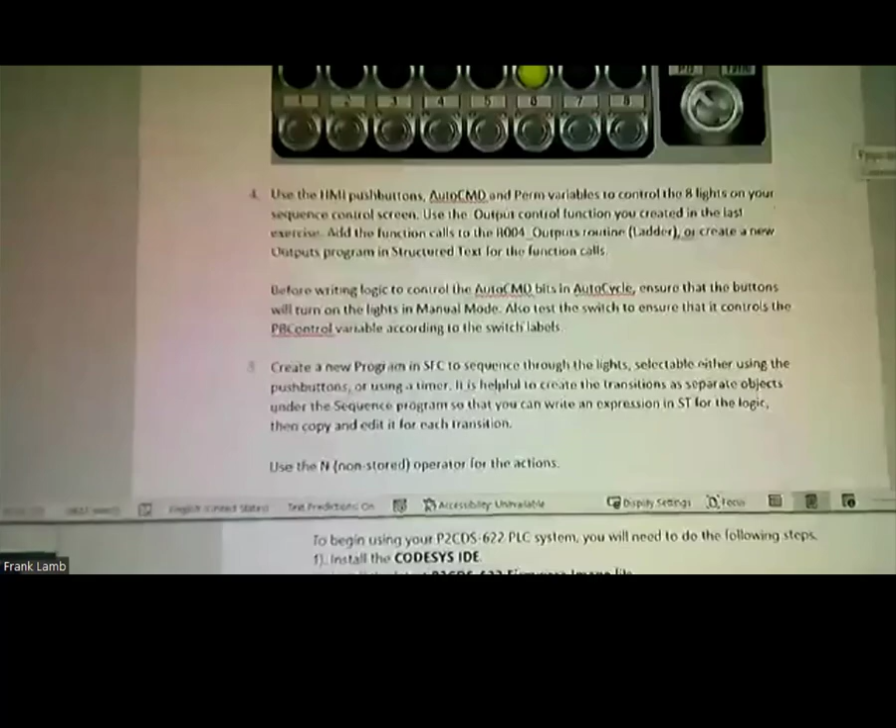And so this is the stuff that I guide students through at NTH University. And then a bunch of stuff on troubleshooting because a particular company wanted that. But anyway, that's a look at it.

At this point, I think I'm going to open it up for any discussion on object-oriented programming. Does anybody have any questions about object-oriented programming? Let's see if I can even hear anybody. I haven't heard anybody say anything yet.

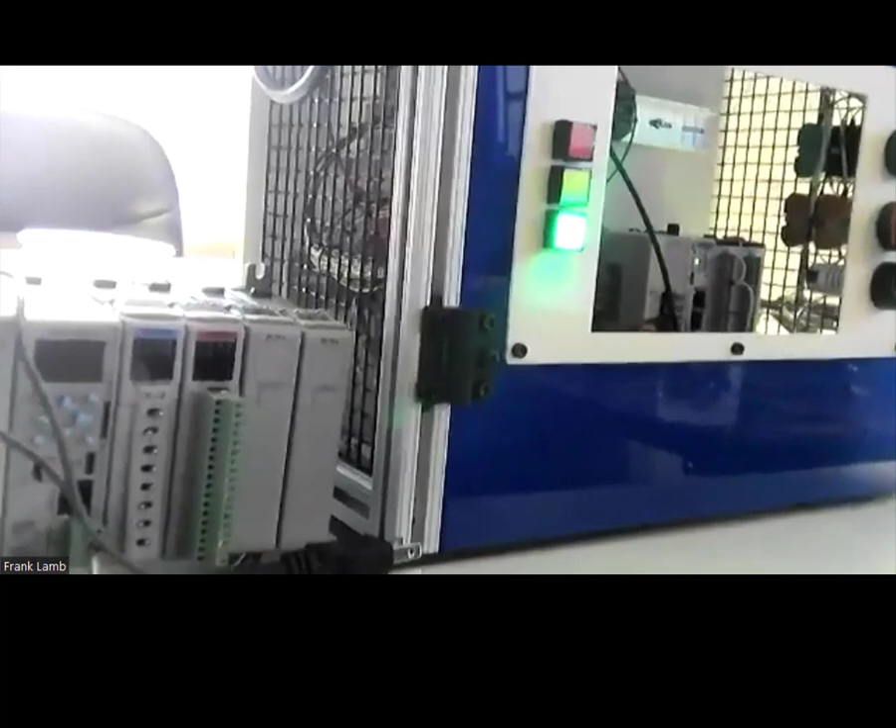If you want, somebody put - okay, full documentation with sample programs. Yes, P2CDS-622, thank you Bruce. Yes, that is the link to the full documentation with sample projects. The sample projects aren't much yet - there's not a lot going on there on the Automation Direct website yet. But there will be, I'm sure people will be posting examples and things like that.

Let's see, where is my Zoom? How do I get back to share screen? Anybody have any questions, comments, especially on OOP, global variables, things like that?

I'm torn as far as exactly how far to go on OOP. As I mentioned, I do a lot of work for a company that uses a lot of Allen Bradley, and Allen Bradley does not lend itself to object-oriented programming. It is mostly in ladder.

No questions. Hey Frank, can you hear me? I can, yeah, I can.

Somebody - hey, my name is Bruce, and it's interesting. When you go to OOP structure, that allows you to, as you know, migrate to other platforms. So certain vendors may be motivated not to support OOP, so you're held captive.

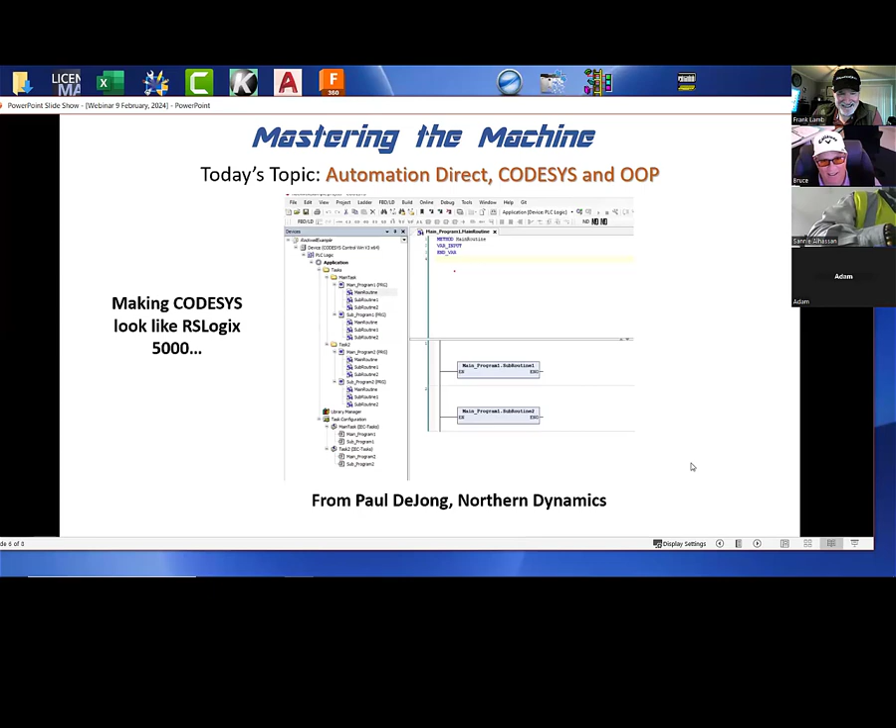Okay, well again, thanks. I'm sorry to go off so much, but I was hoping somebody would pop in and at least talk a little bit about OOP, and one of the discussions I've had also, GVLs.

A lot of people say they don't want to use the global variable lists. They want to protect everything, and the jury's out for me on that too. If people are used to finding everything in one place exposed, I may create global variable lists for my system routines, maybe for my HMI stuff, just so people can find it. So that's kind of my intent.